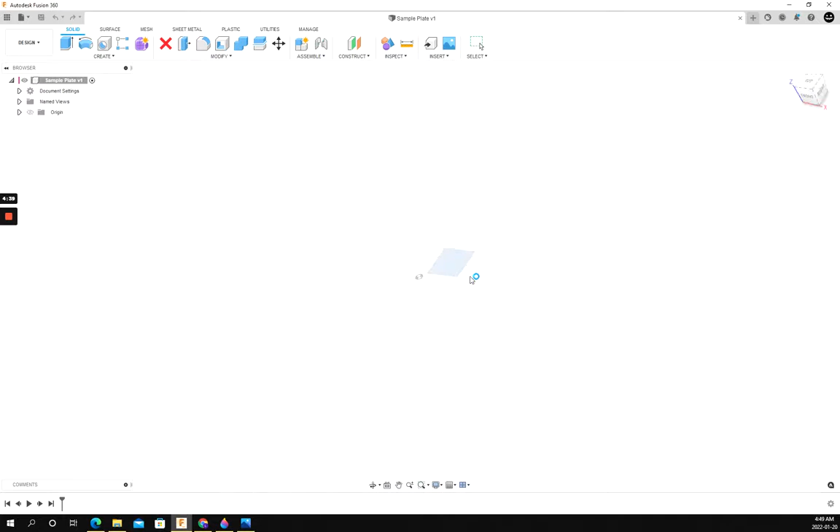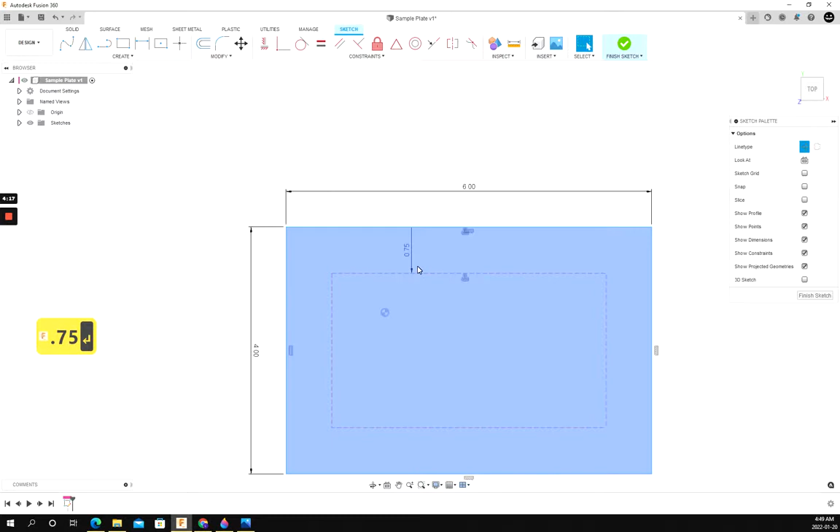Using the rectangle tool, we'll create a rectangle 6 by 4 inches. I would like these bolt holes evenly spaced, so I'll use the offset tool to create a construction line at 3/4 inches away. I'll now use the circle tool to create the bolt holes at those intersections at 3/4 inch.

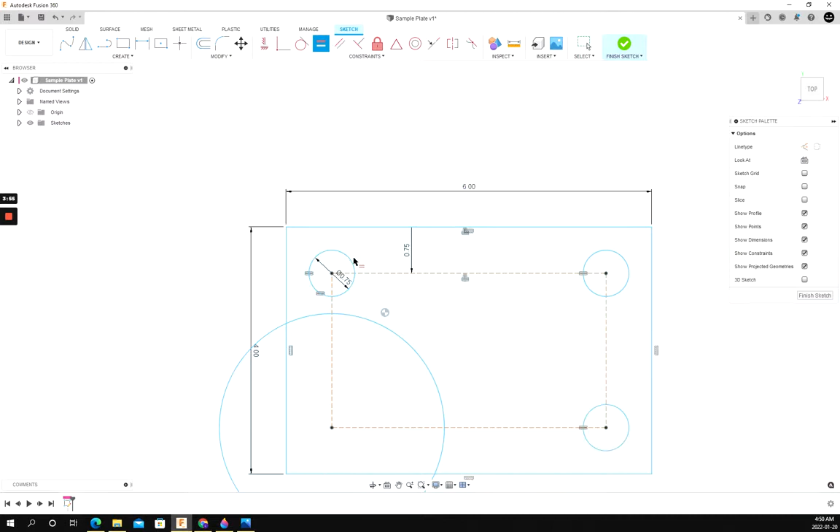The 3 remaining circles, I'll make sure that their centers are at the intersection, pull the diameters out near the first circle, and use the equals constraint to make them all the same diameter. That looks good. Now we will extrude this into the 3rd dimension. This piece will be 3/8 of an inch thick.

I'd like to knock the corners off, so I'll select the fillet tool. And a radius of 1/4 of an inch should be great. We'll move to the manufacturing space, create a new setup. Our machine is the Crossfire Pro. We'll align our box point of YX to the bottom left-hand corner of our material. I'd like to name this setup.

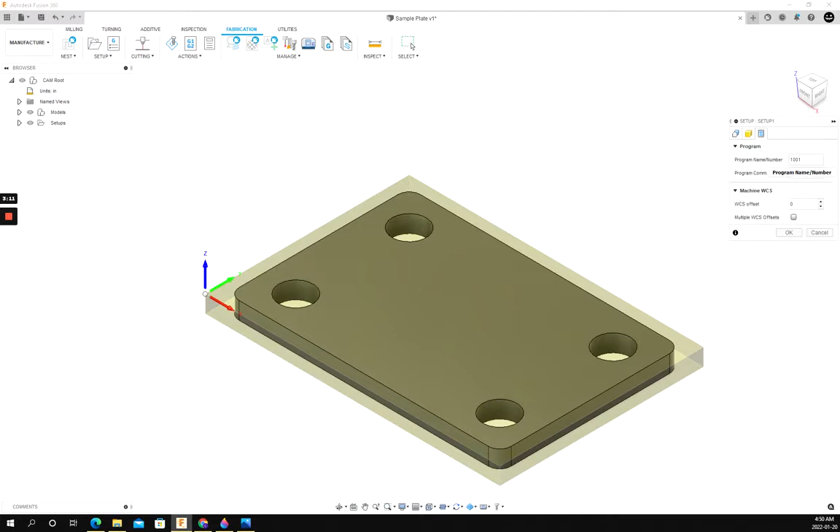Now in cutting 2D profile, I'll select a tool appropriate for cutting 3/8 material. This is the geometry I'd like. Because of its thickness, I'll do a little bit of a finishing overlap so the holes are somewhat cleaner. I'll select feed rate optimization, and all the radiuses I'd like reduced feed rate. I'll do about 60% of our original feed rate.

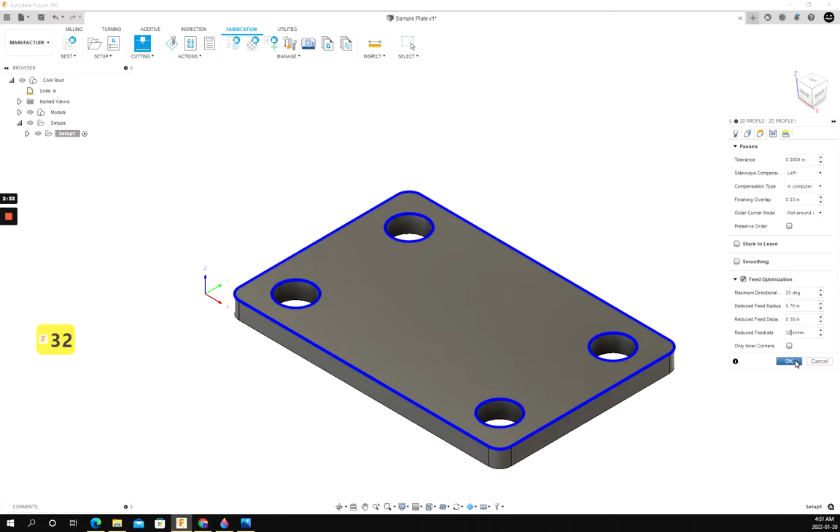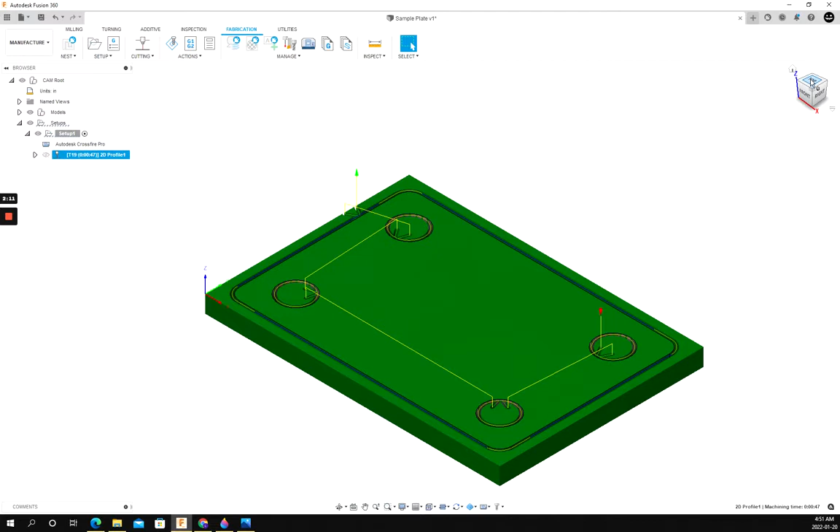In the linking tab is where all our lead in, lead out, lead in radiuses are entered, and I'm going to add a little bit of a lead in radius. And all the rest should be good. It's generated this tool path for us. We're going to take a closer look at it. So it starts here at the red dot, and it cuts out all the interior geometry first. And now it moves to the exterior geometry, and we'll go over some of the color coding.

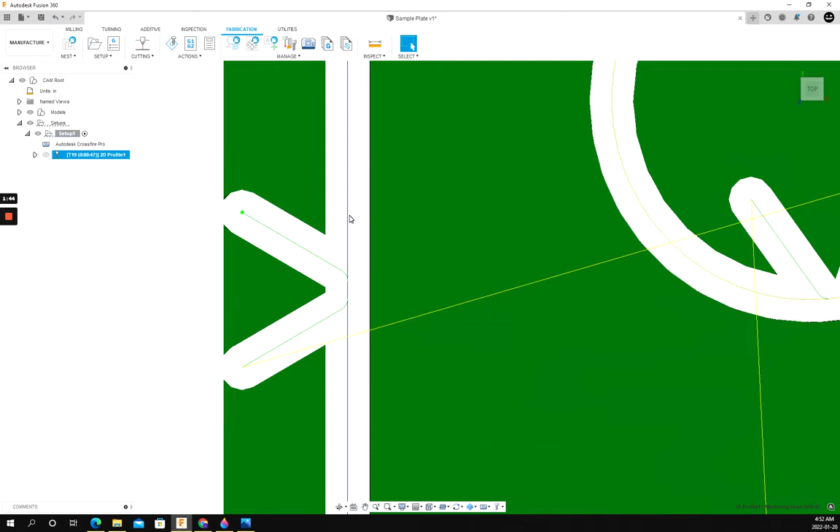This bright yellow line is rapid transit between cutting points. Now it'll plunge down. This is our lead in. This is our lead in radius, and this blue line is our full speed cutting. Now as it approaches the corner, this golden line is our reduced feed rate. It reduces the feed rate before the corner to allow the plasma arc to catch up.

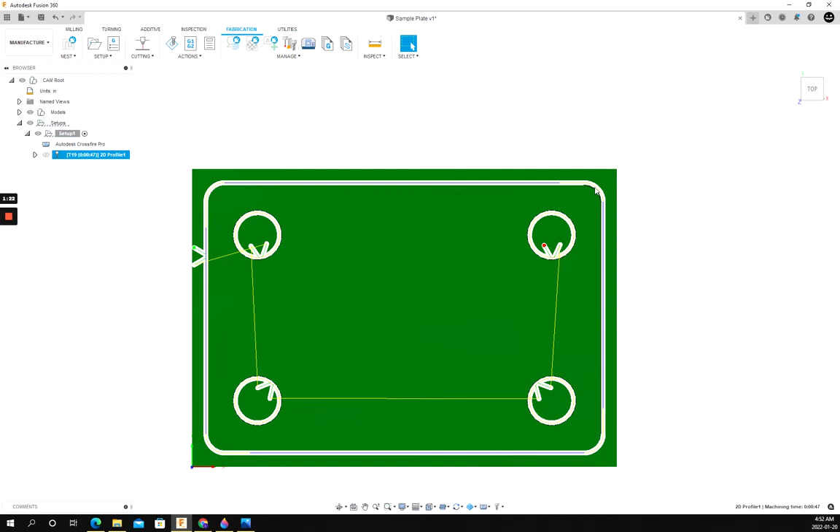It navigates the corner, and as soon as it's cleared the corner, it picks back up to its full feed rate. It continues and does all the outside corners in that manner, and as it approaches the end, it heads past the lead in radius, and this little bit here is our finishing overlap we entered. Now lead out radius, lead out, finish.

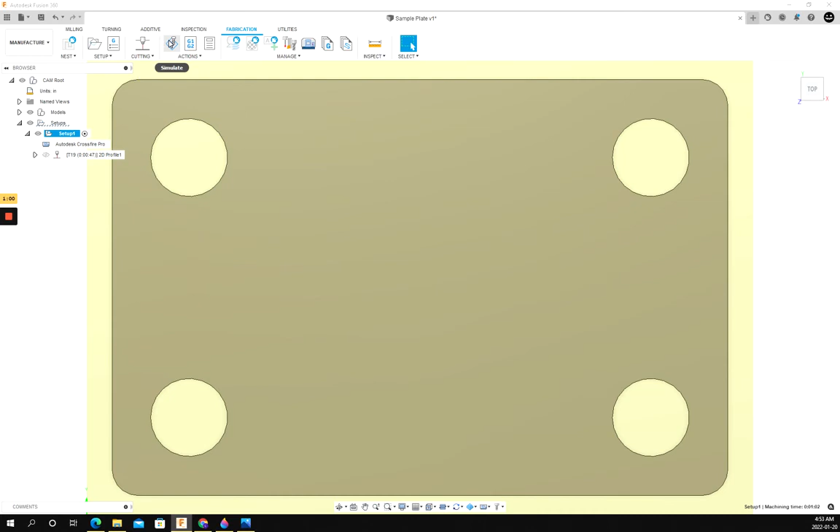So we'll look at this quickly as a simulation. It appears that it's come up with a toolpath that's going to do the job for us. Great.

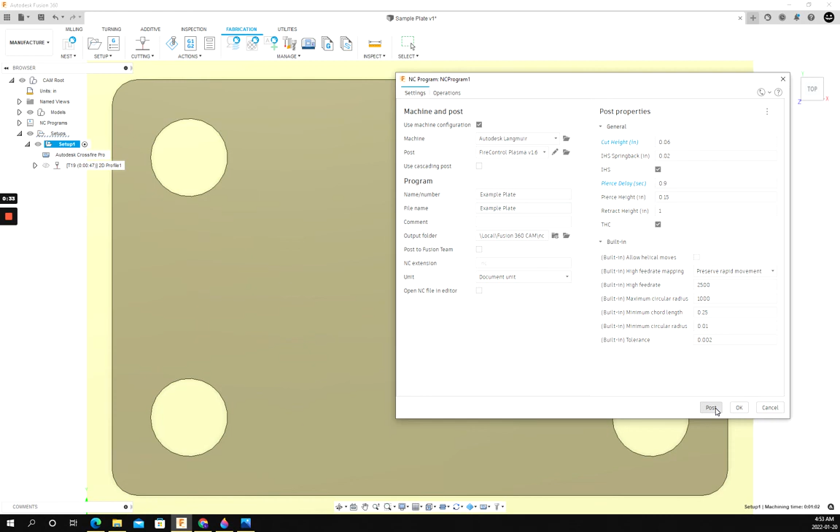Now we'll post a piece of G-code. Here are some of our important parameters. They look good. Post. Now I've successfully posted that G-code. You can see in the bottom right. Now we're done.